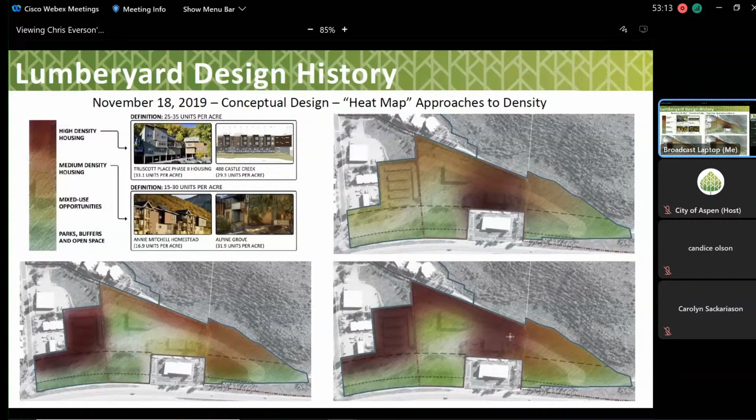Moving on from November 2019, we started to look at different levels of density being applied to the site. We had a 140 unit site schematic, very rough plans here.

Another 175 unit plan here, and then moving up to 215 units here. The council told us at that time, we want to expand the range of density alternatives that the team is looking at. So we were looking at a certain number of units, a certain amount of unit square footage in these plans, and a certain number of bedrooms in each of these plans. I'm just trying to carry through the theme through all these slides of the number of units roughly, the number of unit square footage roughly, and the number of bedrooms roughly.

Moving on to the next point in design, we got to July of 2020, where we really did expand the range of density we were looking at. We had a concept 1, which were these two upper layouts, with a 1A and a 1B. The 1B, again, was that roughly 215, 216 unit range, but a much higher unit range here at the 450 unit level. But you can see what that does to the unit square footage, up to some 325,000 square feet of unit area.

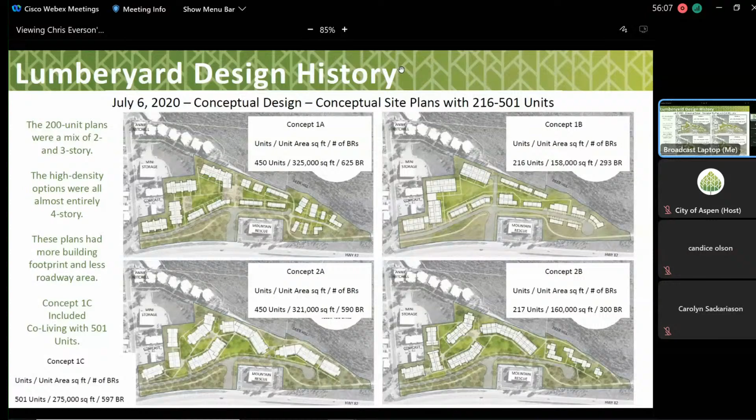So when we then took the next step and decided to go later on in 2020 to our next plan, well, we did still have a co-living plan, but we were zeroing in on this 300 unit range. We had a plan with 250 units total and had around 350 bedrooms. Another plan with concept B here was 300 units, which was about 230 square feet of unit area. And unit area is inside the units, inside the buildings, not overall building area, so that's the total of the unit area, 425 bedrooms in that plan.

And then we did have this co-living plan that had 330 units. We started moving in the direction of roughly the 300 units. I think, Tori, around that time, correct me if I'm wrong, you were 300 to 325-ish when we started going to the next plan. At the end of 2020, or at least in our last work session on this topic, our plan had 310 units. We had 448 bedrooms and 240,000 square feet of unit area. And this was sort of our jumping off point to the schematic design process.

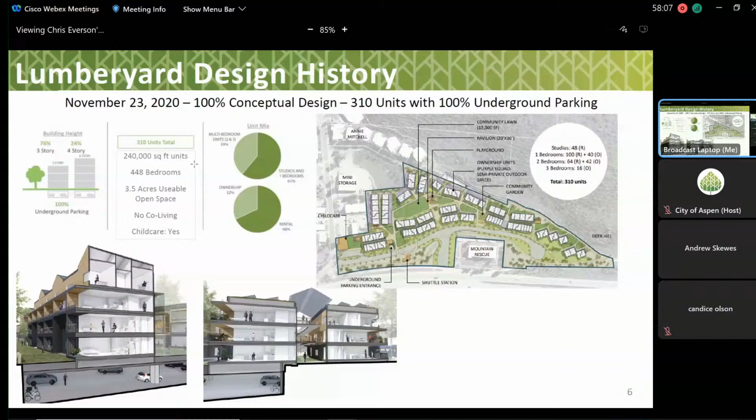Primarily by starting with a parking alternatives analysis, where we started to look at how can we now bring some of that parking back to the surface so that we're not 100% parked underground. We looked at 4 different plans that had basically 4 different approaches to this, and during this meeting, the suggestion was, is it okay for us to bring all 4 of these plans out to what at the time was our 4th round of community outreach, and start to test these plans with people.

These had varying degrees of underground parking. The hinge site concept, for example, in the lower right-hand corner was 60% underground parking. Pivot in the upper right-hand corner was 72% underground parking. The latch concept was 81% underground parking. And we had the flange concept with 0% underground parking. But the important thing to look at here is we've added a bunch of access roads now, which wasn't in the prior plans. So in order to access the above ground parking, we need a way to get to that stuff.

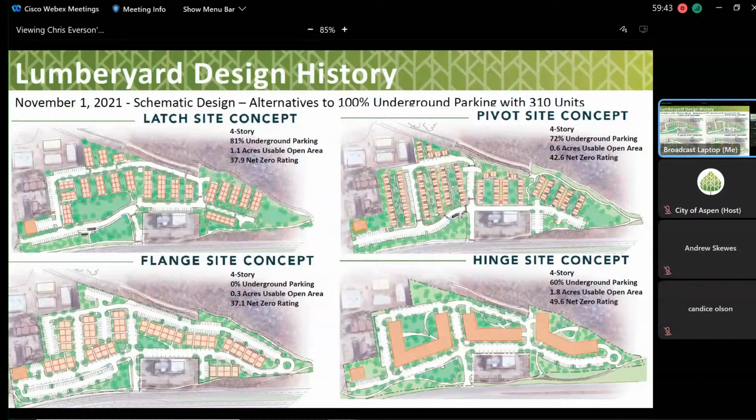So after we took the next step of bringing these plans out to the community outreach, we came back to you in January of this year, and somewhat with refinements to those plans.

And we also at the time had the EPS market study report, and it had sort of a base recommendation in terms of what the program should look like. But then it had an alternate where they were adding more 3-bedroom units, converting a lot of the... we also talked at the time about the studio units, right?

And we essentially made the choice to convert a lot of the studios into 1-bedrooms and into 2-bedrooms, and we added some 3-bedrooms. So now we're adding roadways so that we can access the above-ground parking. We're adding a bunch of unit area by adding more bedrooms to the plan.

And so we wanted to evaluate those 4 different plans, and you might recall that we used this tool that we called our matrix. That's right. And it was through these numerous different categories that we were looking at: community connection, sustainability, pedestrian friendly, living well. A lot of the livability criteria that we talk about as some of the baseline goals of implementing housing that's going to work for the community.

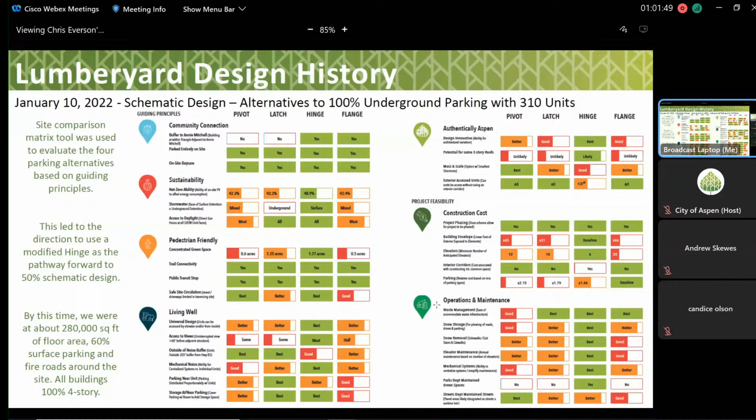And so the decision was made to start to move forward with the hinge plan, and we showed you some of these renderings. I think we mostly showed you this rendering on the bottom, but we did have some other colors. But it was really the height and the way that height was presenting that council had some challenges with.

We pointed out some areas, some challenge areas on this plan, related to just difficult engineering areas where we have some tight areas on the site that we'll have to deal with. At this point, we did know that everything was 4-story massing. There was a lot of attention brought to those open, consolidated green spaces, and a lot of folks liked those open green spaces and those opportunities for livability.

We had 286,000 square feet of unit area at this point, which, remember, we started the schematic design process with 240,000 square feet of unit area. So we keep adding roadways to access our now above-ground parking, we keep adding unit area, and this is coming out of a desire to do as much as possible for the housing crisis.

And so trying to get as much out of this site as we can. And I think you've done a good job of pushing that envelope as far as trying to get as much out of it as you can.

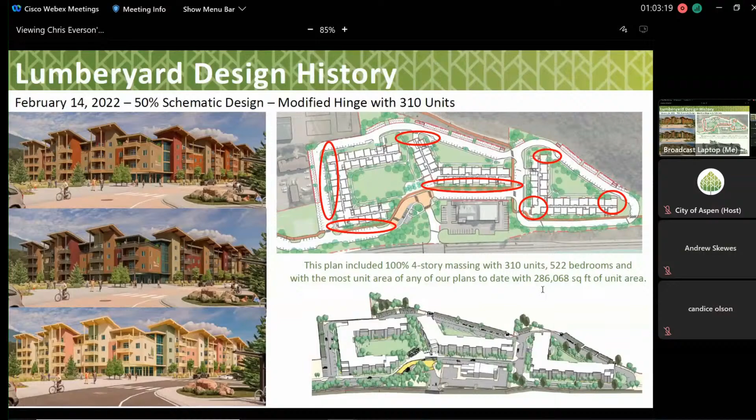And so in our prior work session that got cut short, and our work session today, we're looking at these two alternatives. We did get through presenting to you the 310-unit plan, which has 492 bedrooms. And the thing about the 310-unit plan with 492 bedrooms, that's 44 more bedrooms than when you started the schematic design process. When you finished conceptual design, you had 44 fewer bedrooms, and you had all 100% underground parking.

Now with this 310-unit plan, you have 44 more bedrooms, and you have 43% above ground parking. So I think you've done a good job of pushing the envelope in terms of how much you can get out of this site.

267,000 square feet of unit area in this plan, and again, all 4-story masses. So what the team is going to do is they're going to quickly, again, rehash that 310-unit plan.

And then introduce one of the things you asked for, which was a recommendation from the design team, which they're calling the elbow room plan, which attempts to - I'm going to backtrack real quickly one slide - which attempts to address some of these challenge areas that we had pointed out, and we will continue to point out.

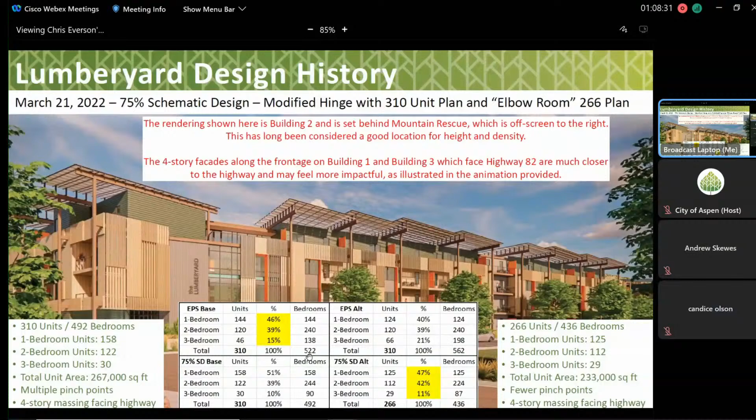We also still have the 310-unit plan to consider, which has more one-bedrooms and about the same number of 2 and 3 bedrooms. So the 310-unit plan really focuses on adding those one-bedroom units. I just wanted to point out where we've come from in terms of the flow of this schematic design process.

So in summary, we started looking at some of these plans in 2019, in the 140 up to 215 unit range. In July of 2020, the 216 up to 450 range. But really, I want to focus on the fact that at the end of conceptual design, you had 448 bedrooms.

If you go all the way to the bottom of this column on the right, which is where we've come in the schematic design process, and look at the number of bedrooms, the 310 plan has 492 bedrooms, and the 266 unit plan has 436 bedrooms. If you look back to where we ended conceptual design, you're straddling that number of bedrooms — the 310 unit plan has a little bit more, and the 266 plan has a little bit fewer.

So I think regardless of the decision you make today, these are good decisions. There's been a lot of progress made throughout this process. You've accomplished some of the goals you set out to accomplish in this schematic design process, goals laid out from the beginning. And you've ended up with 2 good choices, both right near that bedroom count where you started, one a little bit more, one a little bit less.

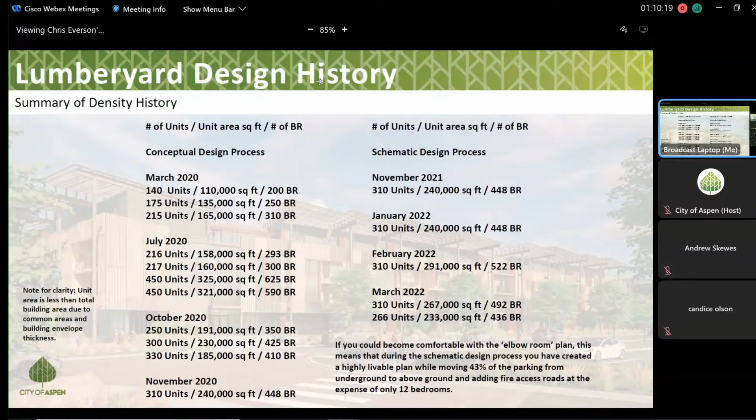That was all I had in terms of sharing my screen. I just wanted to point out that the aim of the presentation today is to make sure everybody's clear on the trade-offs they're making, whether you choose one way or the other. A lot of progress has been made either way.

As we go forward, 100% schematic design is not the end of the line — it's going to be a jumping off point for our development application. There's still room for some modifications, but at this point we really don't have a lot of room to start just moving stuff around the site and making coarse adjustments. After this decision point, moving forward, it's going to be fine adjustments from that point. I just want to make sure you understand the progress you've already made. Unless there are any questions, I'll turn it over to the design team.

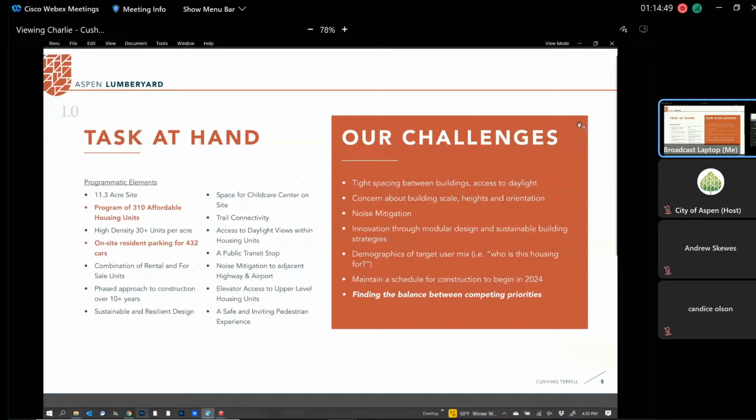So where we're at today is to really focus in on reminding and showing again the implications associated with the 310 unit count and the 432 parking spaces—showing that we've got life safety addressed throughout the entire site. That was a new element introduced related to fire access around all the buildings. We've got 100% of the units being accessible, and we're pursuing the highest sustainability goals that the city has looked at achieving.

We're focused on looking at the unit count, recognizing that we can deliver unit counts and bedroom counts in a couple of different ways, so we're going to give you those breakdowns. We're going to show you, as we did last time, what it looks like to stay the course with the 310, and we'll focus on this elbow room scheme.

The important thing about the timeline is that we recognize we've got very specific topics to cover tonight, and that's why we're asking questions and looking for a specific, singular direction coming out of tonight's meeting—because that's the only way for us to stay on track, stay on schedule, and be able to deliver into the next step, which would be design development. So we'll be back on May 16th with 100% set.

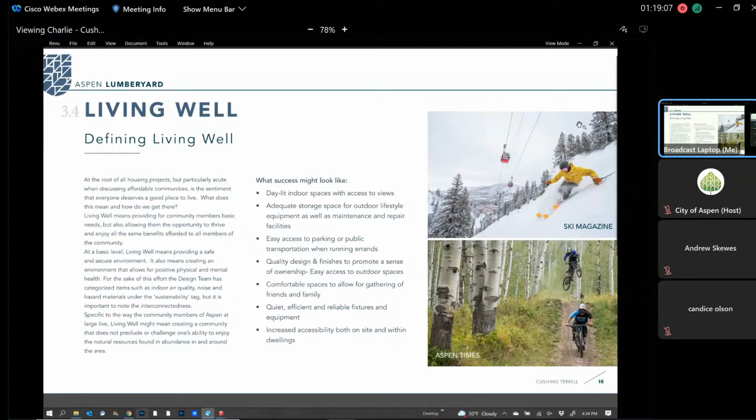In terms of authentically Aspen, we know the direction has to be rooted in and reflective of this place, this culture, and this climate. So you'll hear a lot of that this evening too as we move forward.

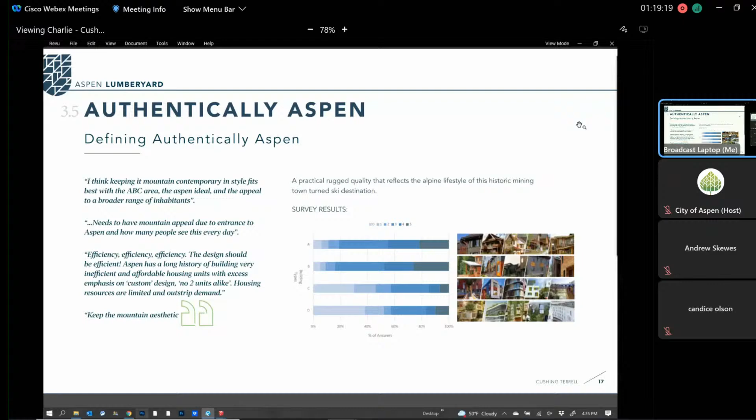The decisions we're asking for tonight are absolutely central to us being able to stay on track and get to the point where we can move through design development and construction documents, and actually start toward construction. This is our only chance to have construction starting in 2024—we need clear direction tonight.

So again, we're pushing livability on the site related to a lot of details we'll discuss. We're questioning whether the unit count should be reduced from 310, and we're showing you the implications of that. We've looked at some different routings for the bike trail, and we'll talk about those details. You'd asked us to provide a more modern, unique design, and we've got more details and refinement of that.

We're absolutely celebrating and accentuating the sustainable character of the site. In terms of materiality and the character of the building, tying that into Deer Hill and its environment is so important, and we think we've got some good images that communicate the potential direction for that. We've also got examples of how we're dealing with the perception of height, with some details about those approaches.

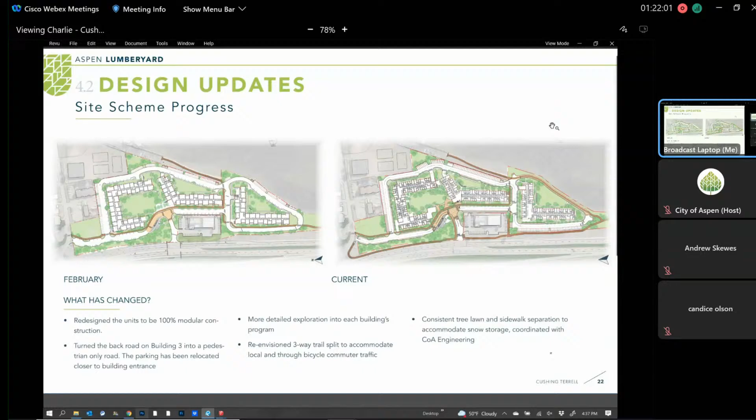Overall site scheme changes here, really just getting to a next level of refinement. The road coming out behind Building 3—Building 3 being the one here on the right, the south end of the site. But really a lot of our focus last time was getting more into the buildings.

So this is the stay-the-course plan. We'll show you this one more time before we get into elbow room, just to draw direct comparisons between the two. They don't jump out at you on plan at this scale, so we want to have those side by side and really point out the differences and some of the benefits of elbow room.

This slide was just highlighting that we can, working with the fire marshal, take out that road behind the building—something we were able to recently confirm last time we met. So I think when you see 100% schematic design, you'll see further development here, hopefully even a little more space donated back to building footprint and public outdoor areas rather than roadway.

Can't stress enough how big a change that is, instead of having a roadway there with cars going back and forth, there's a through pedestrian feel all the way up the hill, without being interrupted by cars passing through. I think it's a major change.

Between now and next time we're in front of you, we'll have a lot more details, probably some perspectives, and be able to talk about how that could be programmed with different activities. It could be more of a Zen connection to Deer Hill. The grading could work very naturally, and there's less need for retaining walls and things requiring maintenance and ongoing operational issues. So there are quite a few benefits from just not having another street and all that pavement and cars. It's quieter, and from a pedestrian standpoint, it's basically like living in a park.

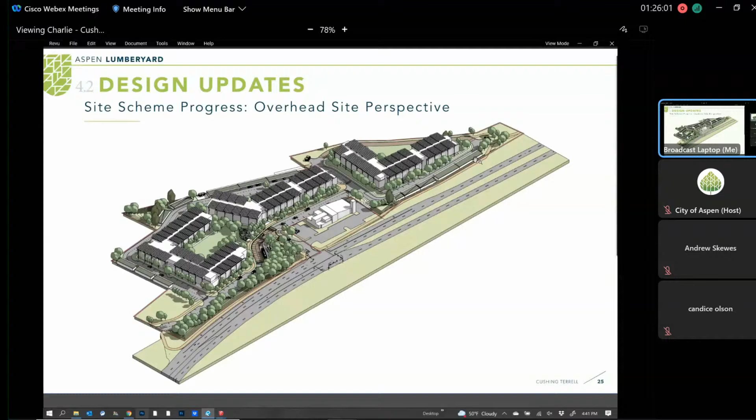Since you bring that up, I wanted to share, I went years ago and climbed the tower to look over the site. What I noticed was at street level, the noise is really lessened by trees and berms, and as you got up the tower, the noise became more and more prevalent. I wanted to bring that up because it really struck me during my site visit.

We keep talking about these 4 stories, and I keep remembering climbing that tower and how the volume just increased with the stairs. So when we get to the renderings showing the side-by-side view of the 310-unit stay-the-course plan compared to the 266-unit elbow room plan, there are a couple things I want to point out directly related to that. Thanks, Chris, absolutely.

I just wanted to point out a couple things, Charlie. In our thinking right now, building 1 and building 2 would be rental, and building 3 would be the deed-restricted for-sale building. So that's 209 rental units and 101 for-sale units in this scheme. Like Chris told us earlier, this 310-unit scheme gets 492 bedrooms, 44 more bedrooms than when you started the schematic design process.

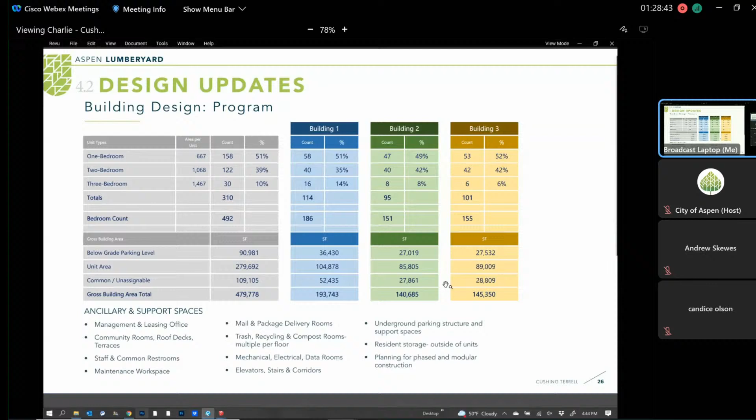What we talked about last time with the unit plans was a focus that moves it more towards a regular module, so there are some efficiencies in construction, with budgets, and even with your approach to sustainability. Fewer corners and details to work around, just a simpler building makes all those things a little bit easier, more effective.

Otherwise, there hasn't been a whole lot of changes in terms of square footage and amenities for the units. With the latest scheme, we no longer have the 2-floor units. Not so much that they were inefficient with square footage, but the way they laid out on site, they were a little bit longer, which created problems with how the building approached those pinch points. Being able to take out some of that length was really one of the driving forces behind removing the townhome units.

We will continue to look for ways to carve out a little bit of square footage with a conscious eye towards budget, but not without sacrificing any of the livability there. I'd say there are opportunities for fine tuning.

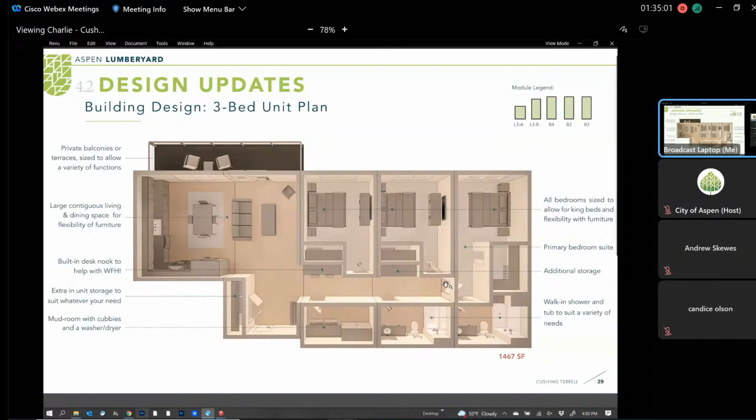Okay, well, I appreciate it, and as Sarah said, we have a team of experts, so the only thing I just wanted to be sure of is that some of the necessities of the modular construction aren't necessarily driving all of the design elements. So for example, there's definitely feelings and thoughts about somebody's living room abutting somebody else's bedroom, stuff like that, because you'd have your loudest area of one home abutting hopefully somebody's quietest area or what have you. But as long as those kinds of things are being taken into consideration, that you guys have that in mind as you're designing and looking at layouts, then I feel comfortable with it. I don't want to get into those because I'm not prepared for that, but what you're bringing up is important.

We have less issues with wall-to-wall unit partitions. We have more trouble usually with floor-ceiling sound and vibration transmission from unit to unit, but still important. Also, these buildings, compared to buildings we've done before, some of which have been very good, these are going to be highly insulated and designed heavily to deal with sound and vibration transmission. That's partly by choice, and now we're requiring ourselves to do it under sustainability programs. So all those things you bring up are super important. Yeah, appreciate it, thank you.

Yep, and really at the heart of why we're showing the units is to just instill the confidence: one, we're in line with APCHA standards for sizing, and two, we've thought through these livability issues. And just as an aside, modular, having those double wall conditions, really helps with sound transmission and reducing it.

Thank you. Same kind of thing with showing you the floor plans - the types of things we want to point out here are some of the hurdles with the concept design that we're addressing, shown here with the direct relationship between parking and the building over top of it. It's just much more efficient use of space on site and dollars when it comes to construction.

Also wanted to point out that one of the things that comes up commonly with public outreach is storage, and making sure we've accommodated that to some degree near the parking, knowing that people have bikes, and that's one of the biggest issues - getting all your outdoor play stuff to your car and out. Whereas if you had a garage in a single family home, that's not so much an issue. So just helping out with livability.

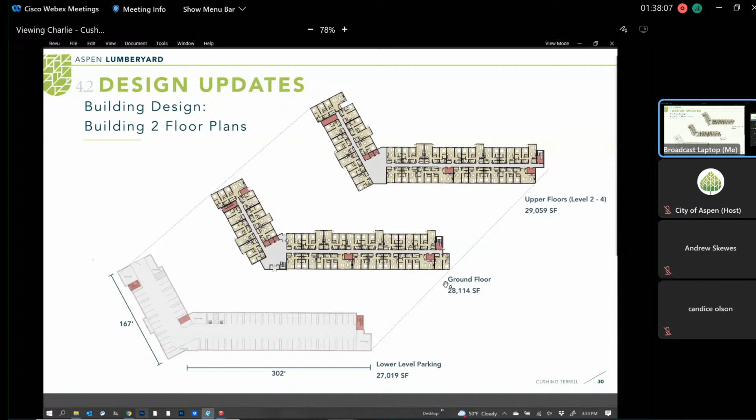And then as we get into the individual floor plans for each building, we're showing the ground floors really to show you some of the relationships, in bright red, of some of the leasing and common spaces, some of the amenities to these buildings, and also just how you operate these buildings. These buildings require leasing offices, maintenance staff, et cetera. So showing that that's accommodated for, and that stairwells and trash rooms are well dispersed and not inconvenient to residents.

Things like elevators have a pretty high price tag associated to them. That's one of the advantages of the hinge scheme versus some of the others, because we only have 3 buildings, there's fewer elevators. But we're making sure if someone parks on one end of the building with a stroller or a ton of groceries, they're not having to walk all the way around the building. So those are the kinds of things we're trying to illustrate with these plans.

That's following suit with buildings 2 and 3. One thing to note with building 2 is that with buildings 1 and 2 being leased, the operations for those buildings don't have to be dispersed between the two, whereas if building 3 is ownership, they need to have some of their own support spaces. We're making sure those are accommodated, and we're still at a level that's not all worked out.

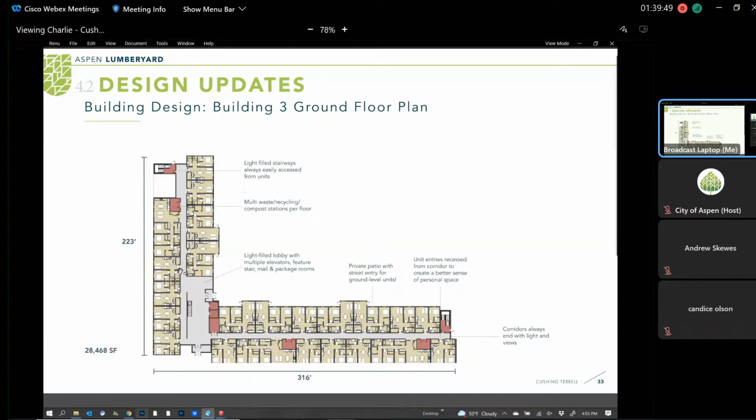This council and a lot of community members were reluctant about the large buildings, and indeed some of the early plans we saw were much more broken apart on purpose, checking that out for layout. But this council has gone with these larger building models because efficiency was a big deal for us.

I'm trying to remember, interior corridor versus exterior entrance. People wanted the exterior, and it was one of the few things, but they also wanted the environmental stewardship, and so that was the necessary trade-off.

In the open space between the buildings - that was another real positive about these. I guess we had a list for that - the matrix, I'm told. Yeah, right, the matrix. We spent some time on it.

Looking at all of those livability components, the sustainability, the efficiency of big buildings - I don't think loving big buildings was one of the reasons why we chose this plan, but there were a lot of reasons to choose this plan.

In terms of your net zero related goals, this was the best fit. In terms of casting large shadows throughout large parts of the season on the next building, and the difficulty that comes with casting shadows from one building to the next - there were lots of reasons, including snow removal.

In terms of its location on Deer Hill, which is in my backyard, I walked up and down Deer Hill many years, lived there 15 years, took lots of photos. It's a harsh, tough environment up there, mostly a sagebrush community with some Gambel oak, so there are hues of green. What I was really thinking about is how can we integrate the sage colors and the green colors.

What I seem to remember is this plant that comes up pretty soon, in the middle of April, so to speak. It's called the arrowleaf balsamroot, that yellow plant that comes up. You'll see it on a lot of the hillsides around here, and when the flowers come out, it's an amazing pop of color we get between April and, I think, they start to go away in June.

That was one of the inspirations for the colors, as well as the Indian paintbrush, with its red hue. These are really amazing plants that rely on other communities, other species to thrive, which I thought was a nice twist to what we're trying to do here.

So the palette you see here, the greens through the oranges and the blues, are completely taken from Deer Hill's palette. There's nothing man-made here whatsoever. I've just been feeding these guys the colors and ingredients that have come directly from Deer Hill, and come up with that palette.

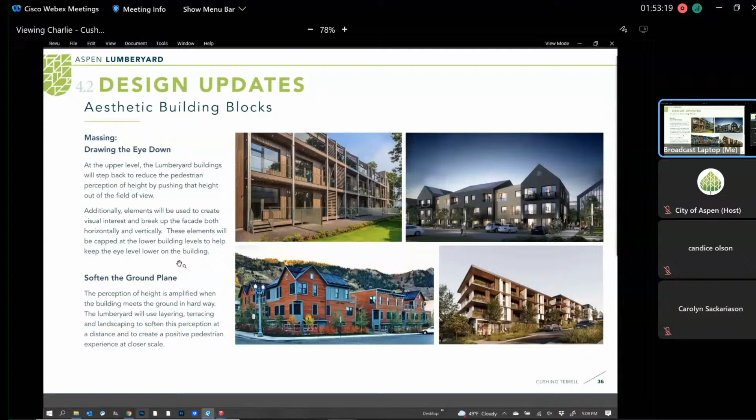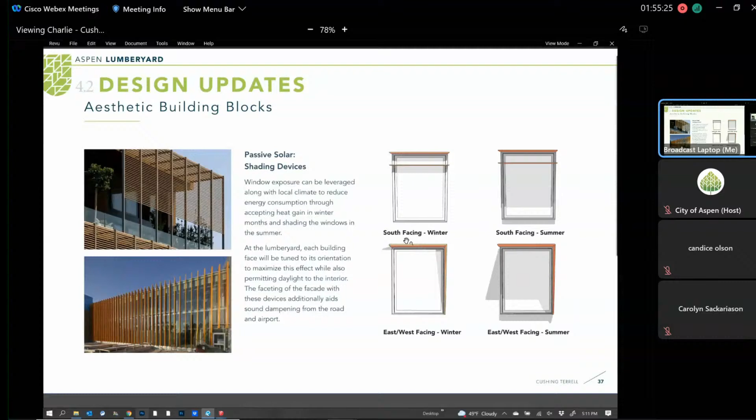But that's starting to build a language for this design, an aesthetic that is functional. So how do we take advantage of that?

There's also a lot of advantage in this in terms of our modular design. Having a separate structural skeleton for supporting the solar system works really nicely with the modular design - they're not competing. We're not having to get overly complicated with the modular units and how we're integrating that. They play nicely together in the same sandbox.

While we're on that - early discussions sometimes brought up the idea of usable rooftops and even green rooftops. In the last iterations, we've really seen all of the rooftop being utilized for the solar. I just wanted to check in with council members and make a note of that. How do we feel? Where are we at with that?

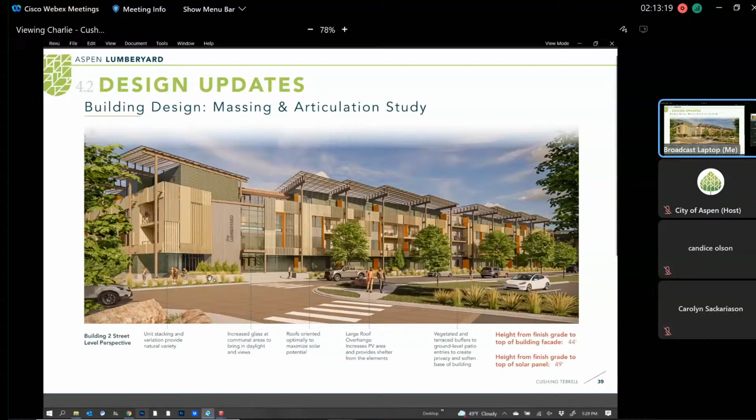So just to interrupt real quick, I want to be clear, the material choices are not made yet. But the intent of what we'll be aiming for when we choose the materials is the purpose of those choices. The idea that we would use lumber is not predetermined. The material choices here are going to be very important in terms of maintainability and sustainability. So the intent is here, but the actual material choice is not necessarily made yet. Great point. And really, your feedback today sets us on a course. There's still plenty of decisions to be made, especially with materiality and how we actually construct these things. But knowing that the intent is right lets us move forward on that path.

Yeah, I'm just a little curious on the corrugated metal. I know I've seen some faux old buildings that use a corrugated metal, and it gets oxidated and looks rusted and old, and that kind of adds to the mountain aesthetic. Is that what you're envisioning here? This looks pretty contemporary. I'm just curious how that fits in.

So we've actually talked about a couple different things. One was we were curious what you were going to call out with the orange here, and the idea of the metal you're talking about is called Cor-Ten. What it does is it naturally rusts and creates a protection layer at the top, and underneath is protected from that, so long-term it's a very durable material. It's not a very nice material to interact with in terms of being up front to it and touching it - it will come off on your fingers. You don't want to have to seal it.

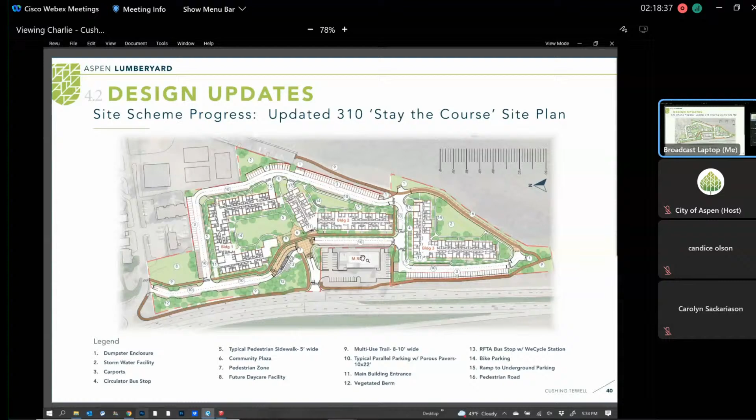Yeah, I went over this at the last meeting in some detail, but I thought this would be a good opportunity for you guys to ask any further questions you might have. Again, this is the full 310. We haven't started talking about the elbow room scheme yet. We'll get into that in just a minute, but just want to give you an opportunity to ask me any questions about the site plan or the team about 310.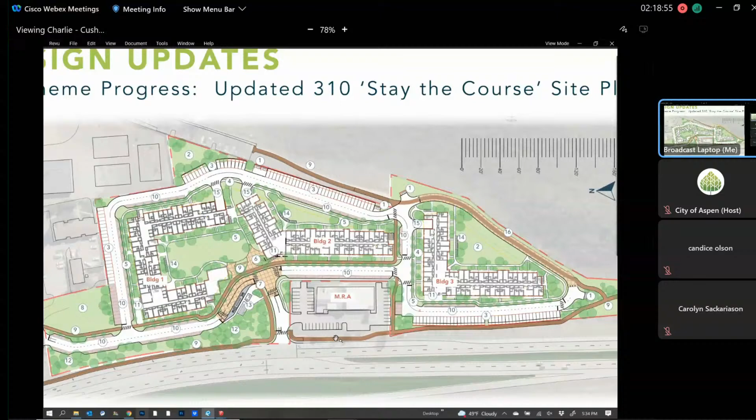Alright. I'm sorry, you're asking for any final? Well, we're just, if you've got any questions about what's going on in the site plan, where the roads are, where the parking is, any clarifications you need—any high-level questions just to help you orient before we compare one scheme read for the other.

This plan, is it legible to you? We spent a lot of time on it in the last meeting. We just weren't planning on going through and walking through it in the same way. If that would be helpful for us to spend more time on it, we can do that. If the council has a general understanding of the 310 site plan, then we could move on and do the comparison and explain the other items.

Good, skip. Okay. I think you covered this previously, but that the perimeter road would be wide enough for a bus to do a circular route? More than enough, yes. It's really the design issue for it is the fire truck, and the needs of the fire truck are greater than the bus. The radiuses and all those things have been taken into consideration in the same way.

Unless, of course, you're bringing back RFTA's articulated bus, which we haven't seen. We've reviewed those things with the engineering department—we've been having meetings with engineering staff who's been extremely helpful, participating in the process with us and helping to guide us with things like that. Yep.

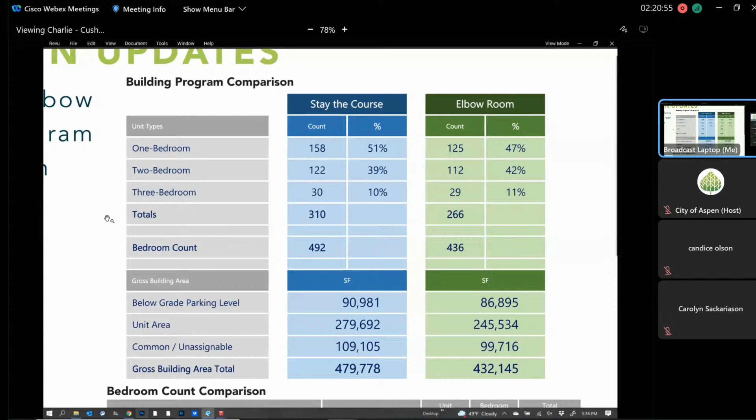So we just wanted to put these two programs side by side. In blue, that's the stay-the-course plan, the 310 unit scheme, and in green is the elbow room scheme, 266 units. Reflecting on the differences: with the 310 we've got 492 bedrooms, and with the 266 we have 436. That's a 56 bedroom difference and a 44 unit difference. So those are the specific statistics associated with those differences.

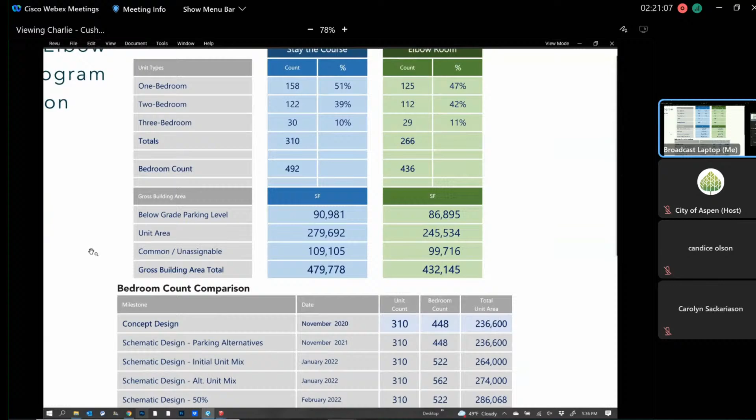When you go down to the gross building area, comparing 479,778 to 432,145, that's a difference of 47,633 square feet. So with the 44 unit reduction, there's also a 47,633 square foot reduction in that total project area. That's a gross calculation there.

There's a big money difference right there. That's a dramatic impact on the budget, the initial budget that would be necessary for the project. I think that's important to recognize as an aspect of this.

We talked about how bringing 43% of the parking to the surface creates some savings there, maybe $10+ million. That difference in gross building area between the 310 and the 266 plan is about 50,000 square feet, which is $20+ million. So if we look at those two things together, the savings associated with the parking approach plus this square footage reduction, that could be upwards of $30 million associated with the impacts of these kinds of decisions.

The other couple things we just want to note: funding being a constraint, right? That's a difference in implementability. You'll need more money to implement the plan that has more.

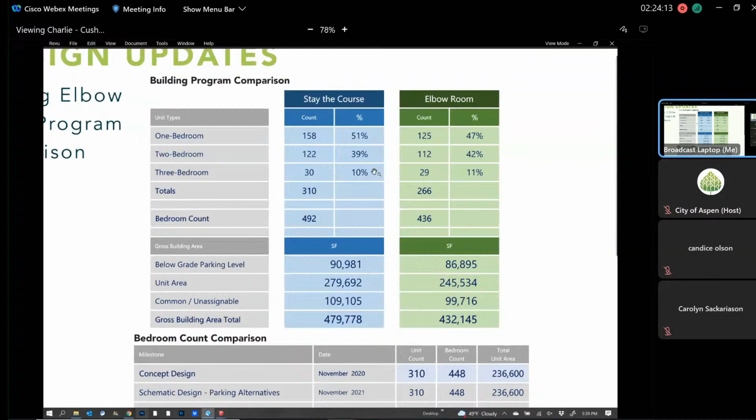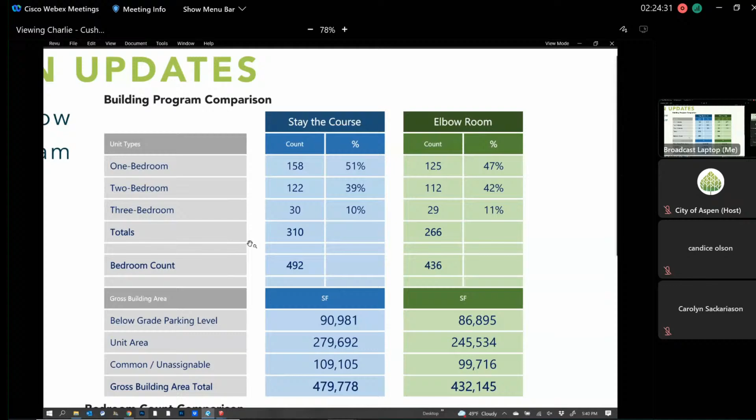Can you go back to the side-by-side table? I'm just trying to make sure I understand the numbers—this one, at the top? Yes. And that's unit count on each one, right? Yes, and if it's helpful I could go through the breakdown. What I was trying to figure out is it's 33, 10, and 1 are the differences, but in the other slide I thought you said we're only losing 12 bedrooms—did you say that? Yep. Look at the bottom, you'll see that, going all the way down from the original. We started schematic design at the top of that chart, where it says bedroom count, with 448 bedrooms.

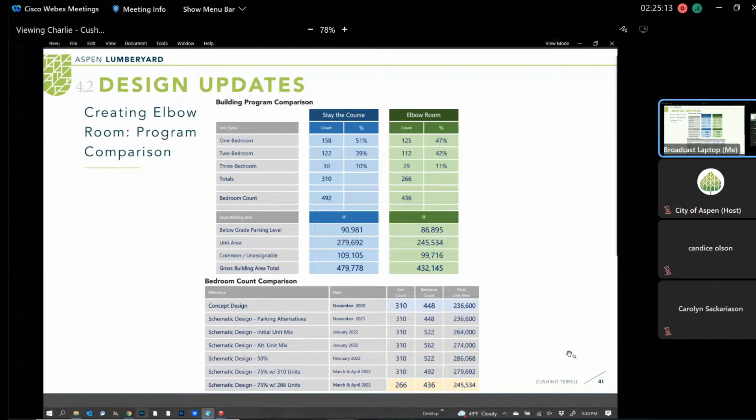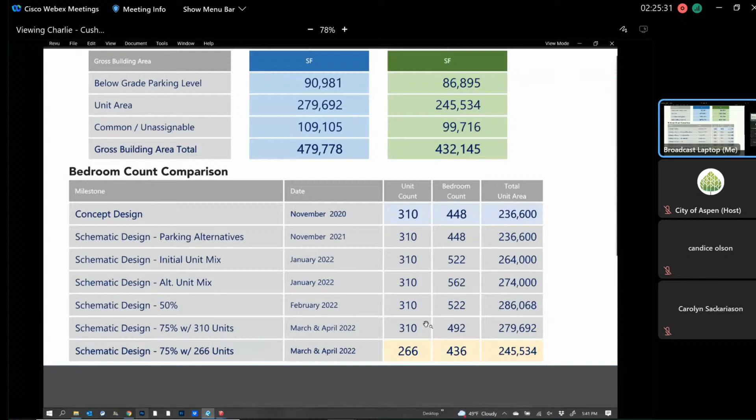So jump to the bottom two in that same column: it's 492 in the 310 plan, 436 in the 266. Just one other thing to point out here: the 310 unit scheme at 75%, with 492 bedrooms, that's 44 more bedrooms than we had in the original scheme. So we actually increased in the 310 scheme by 44 bedrooms. Understood, thank you.

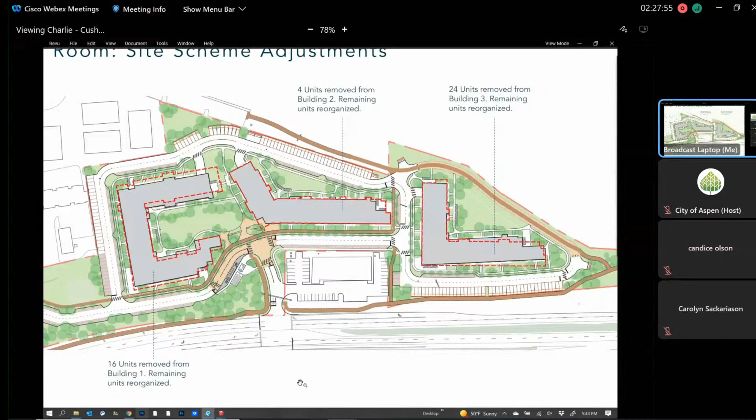But what we're looking at in the solid gray hatch is what we're going to get into. This is our preferred direction at this point, 266 units, going through the units we just talked about that were removed. Again, that's a difference of 492 bedrooms versus 436 bedrooms. We've got a few more slides coming up that will zoom in.

It's a little difficult to read, but we'll talk about some of the obvious benefits in front of us. Obviously there's less parking required with the 266 option. We're actually showing the same number of parking spaces above ground as below ground, and we're at a ratio of 1.53 parking spaces versus the required 1.39.

So less parking could happen here and could occur here. As a result, we could remove parking from the basement or the surface and create more storage for the tenants, which has always been a hot topic item. Anyone you talk to is after more storage.

Another item that will come up is part of our sustainability approach. With the solar, there's going to need to be some storage and battery backup. So some of that space that's maybe parking now in the basement could end up flexing with some needs for battery storage.

What was referred to in terms of potentially reducing some of the on-site grade parking is we've started to talk about this in previous meetings, things like Uber pickup or food delivery loading zones, some things we all think are necessary and important aspects. Maybe we pull some of that back from what's shown currently as just straight surface parking, and get some of those features folded in.

Sunlight is a huge quality of life thing. But I was wondering, looking at this, the only area where I'm seeing buildings close is between 1 and 2, and it's sort of that half - so is it just that corner that's representing the whole thing? And isn't that a stairwell on the backside there, like half of the building's a stairwell? Yeah, so there is a stairwell here, and there is a unit and a stairwell on this back corner.

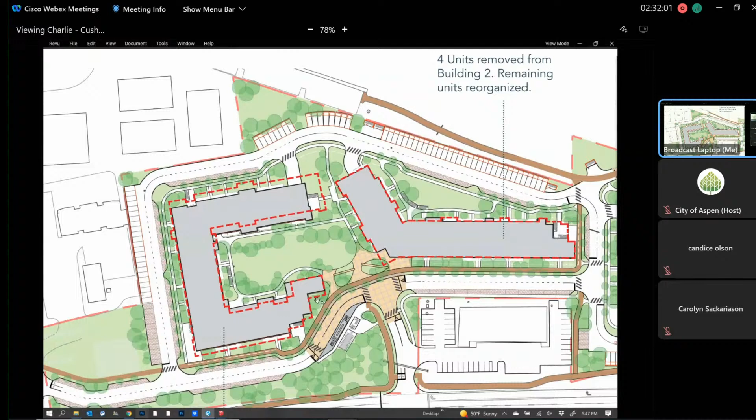There's a number of reasons for making this shift. I'll just go to the next slide. All I'm asking is that, because that sun seemed important, but is that actually going to make any difference? Let's get into the units, or details, if so. Is it just obviously a couple units? It'll make a big difference, I think, for a number of reasons.

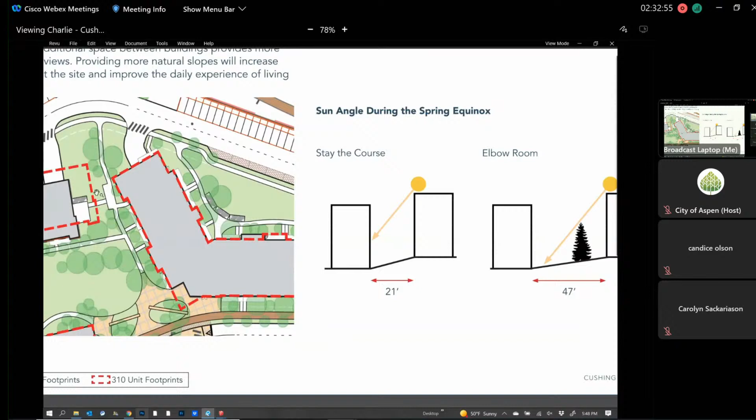One is daylight on the unit that is in this corner, or I should say on this bookend. The other is trying to get more daylight on the ground there, knowing that's going to be a maintenance concern. Over the entirety of the site, our grading works out pretty well, except for here, because it's a pinch point. So this is to scale in terms of building height and the grade difference between the two. And when you start to layer in sidewalks and stairs into these units, you can imagine how 21 feet is a challenge in that area. So it is daylight, but it's also having a space that transitions nicely between the two buildings.

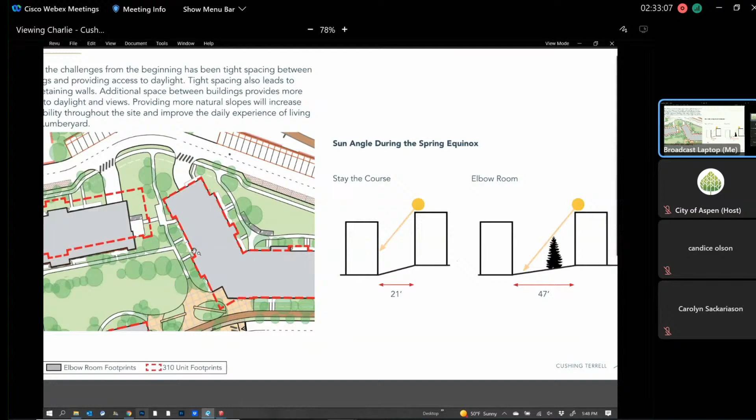The other important thing is the vista upon arrival at the site. As you come up to the intersection with that 47-foot width as opposed to a 21-foot width, your view through and beyond the site will be a dramatically different experience.

Your point's well taken in terms of the sun, but you've actually pointed out very correctly, there's a stairwell access point right there, and having the sun be able to melt that snow versus having it shoveled or be icy, was one of the arguments I was going to bring up for leading.

Got it. But yeah, on the snow topic, we've been working with city engineering, very keen on lots of snow storage, lots of separation between the sidewalk and the back of curb. With the 310, we made it work, but there's very little wiggle room for additional snow storage in these bigger years. So snow storage is a big one that we're getting as a result of the elbow room concept.

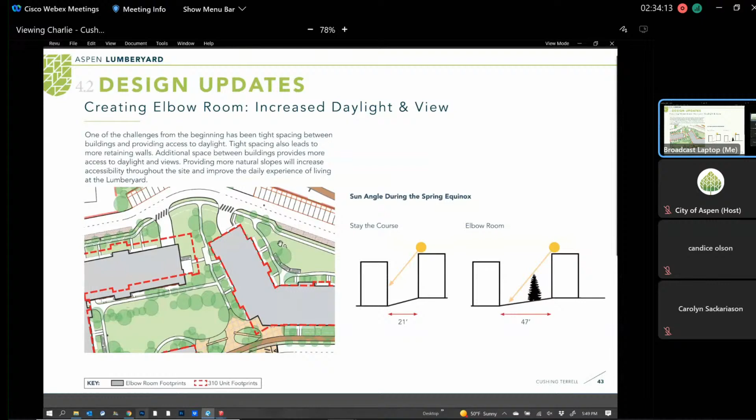And then there's a few other items on your list about the fourth floor. So this starts, and Giles can speak to this as well, but one thing I wanted to point out is the specific difference in the relationship to the sidewalk.

Stay the course. This is not the universal condition. In most places, we have been able to accommodate a nice soft transition like this, but with stay the course, there are places where it will be difficult or cost prohibitive to access that ground level patio.

Whereas with elbow room, we can say with authority that this is the condition we can achieve with all ground floor units. Is the condition to the left adjacent to the front of building 1 along the frontage? It could be building one as well. There's a couple places. I look at that grade transition there, and we have to figure out, as we bring this to implementation, it does make things more difficult. It's not only livability, I mean it's doable, but I more see that turning into a wall, or something like that.

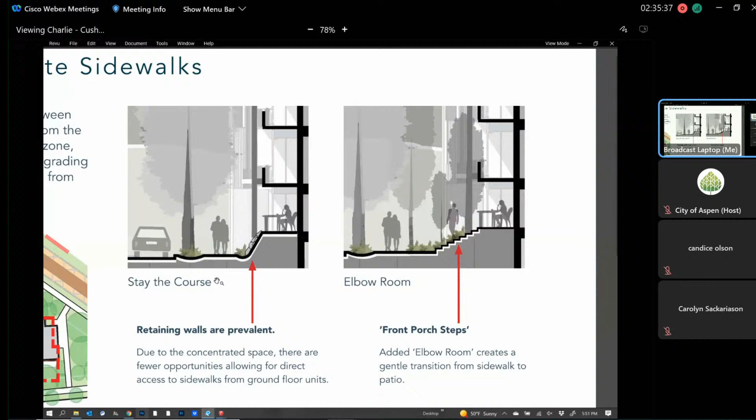But can we look in plan where that occurs? So we illustrated it here as one example. It's happening on building 1 as well. I'll go up to the overall site plan, and it was also happening here along building 2.

So it's just so much more livable with that, and there are no pinch points. It's no 'ooh, we could have done better.' It just fits, it's like wearing the right pants, it just fits really nicely, with the before and after. Just trying to squeeze in some elastic waistbands. So this slide is a great one to just bring this up.

I was very much in favor of you guys giving us your input, and you really have come back with exactly the information that I was asking for and hoping for. The sad part is how many units we're losing, because there was no intention of just losing units for the sake of losing units.

So it's easy for me to say at this time, I appreciate what you're demonstrating here. And I believe you in the sense that these seem like good changes to the program, because of how it's going to play for years and years to come. Last thing I want to do, and that's what I was asking about with the design of the bedrooms or the layouts of the apartments, is put something in the ground where people really don't like it. When it comes to your place of living, it can be somewhat small things that make the neighbor feel how on top of you other people are. And that corner image you're showing really demonstrates exactly what we're talking about.

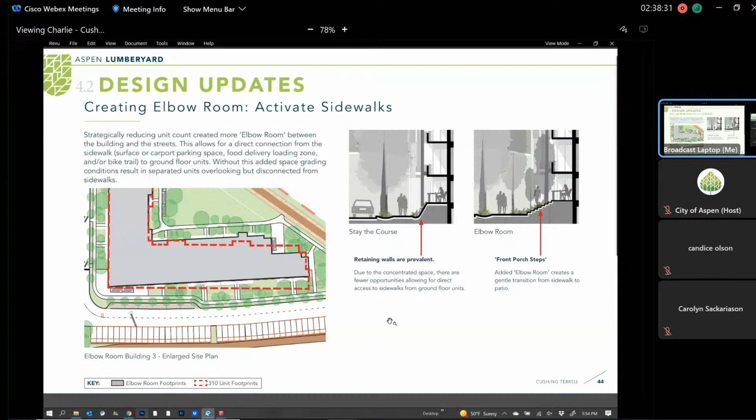We anticipated that you'd feel that way, and that's why we feel like these are two good options. I think we need to, this is to my team here, pick up the pace and get this information, because we've got a handful more of these kinds of issues to go through, and then we're going to summarize with some things. Let's do it.

Sounds great. So the next series of slides is really looking at height on 82. This slide is showing you where we think it's appropriate to suggest reduction of height along 82, and that's with Building 1 and Building 3. These are where the buildings are in closest proximity to 82. So this isn't just perception of height. This is, I think, Tori, you mentioned, they're right up against the airport, in terms of those fourth floor units being the ones most affected by that line of sight to the airport.

It's exactly what you were talking about, Mayor. It's the top of the tower, it's what you experienced. So we're proposing that for those two buildings, in that almost even line to where you were standing at that tower, we consider eliminating those. Part of that is the sound issue, absolutely, and part of it is just a scale issue. We've got some images to show you to explain that.

So this is an illustration of Building 3 in both schemes - the stay the course scheme, and the elbow room scheme. Looking at it, if you did take that step back, there are obvious benefits: height on the street, noise from the airport. How else can we take advantage of that space? You reduce that line of sight and keep the units on the back, and then you can make a green space. This can be communal, or it could be somewhat controlled by the units associated with it.

It also allows an opportunity for these units to potentially be accessed directly from the outdoors. That's something we heard from the public. It's still accessed through an elevator and then outdoors, but it's direct daylight through your front door rather than to a corridor. Can you zoom in on that plan you were just focusing on, just for a second?

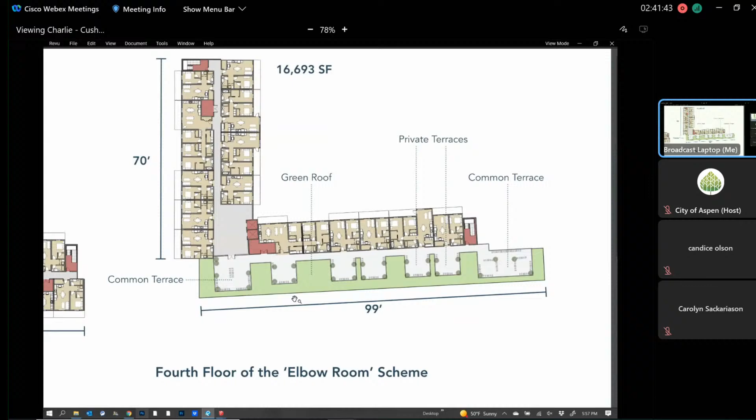So you could see that, just like Charlie was saying, you could come off the elevator, come right out, and walk along that terrace and get to your apartment, then get to the fire exit, the stair at the other end. Along the way, those could be some common terrace spaces, set up as more directly related to the apartment units, so they could be little private spaces for those apartments - but this is just a concept, just an idea. What we're showing in green could be green roof, and the rest could be a terrace deck surface. So we'll show you what sections through that look like and how that's got its own set of benefits.

So real quick, that is Building 3, which is meant to be the ownership building. You would have a similar condition at Building 1, which would be rental. You may or may not want to choose to create those spaces exactly the same way because of those two slightly different uses, so we would have to carefully plan the space out. But the condition of removing the units from the front of the facade would be the same.

Well, when we get to the side-by-side rendering comparison, let's talk about that. You'll be able to see the facade, which will help address noise. We'll talk about our sustainable building envelope, which will help us address noise. We'll talk about the use of the windows, which are needed to help us deal with our building envelope for sustainability, which also helps with noise. Then we'll talk about how you open it up. Want to go to the rendering?

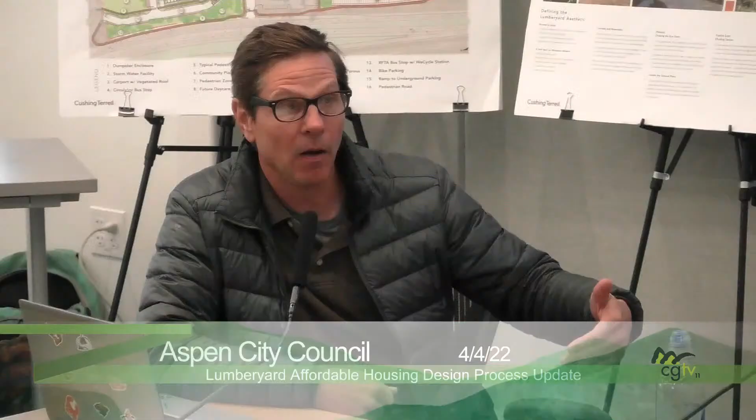Maybe it's off-season, maybe there are different times when it works better than others. So I was going to bring that up during the rendering portion. Do you want to go to the rendering first and then go to the sections? Yeah, we can skip ahead.

The section works as well. But the point is, it's not necessarily universal. You may want to use that upper level space, but you're making a choice to step outside onto that terrace, knowing there's going to be operations related to the airport as well as the highway. So you step into that terrace area knowing there's going to be some noise out there, and during different times of year and day, seasonality may change your ability to use that space.

But it also changes the roof line of the building. You can see in the bottom rendering more of Deer Hill above the top of the building because that upper level is stepped back. You can see how the eye is drawn below those solar panels to that stepped-back portion where the passive solar facade is. That passive solar facade is going to help us shield noise additionally - it acts as the handrail for that terrace area, and it helps partially block some of that noise as well.

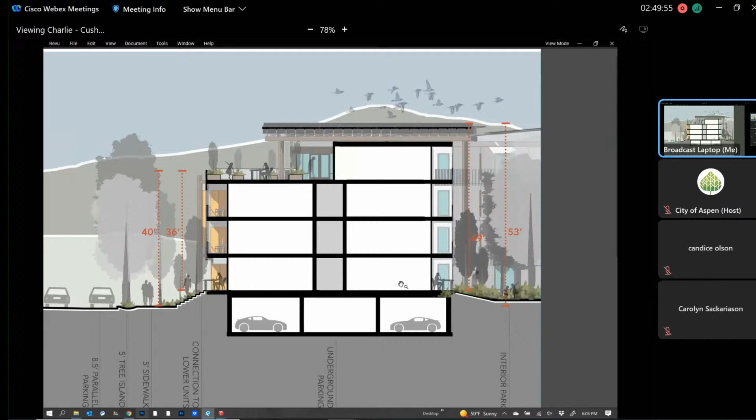We think that section tells a pretty strong story about how the apparent height of the building would be different, not only from 82, but from walking down the sidewalk or driving down the internal streets in the neighborhood. The solar panels also pull back - when you compare the two sections, you can see above the fourth floor roof line how the solar panels pull back, so there's actually open sunlight getting to the majority of that roof terrace area.

How does that affect the overall solar energy goal? What percentage do we lose? So here it doesn't show up perfectly clearly because the building is angled at this point, but the solar is broken up, creating this rooftop corridor for maintenance, et cetera. Here, it's pretty much the same amount of solar, just smushed back.

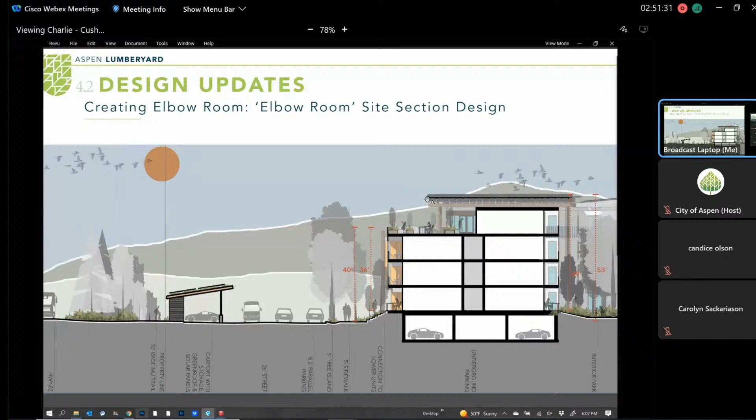The elbow room scheme has 3-story faces at buildings 1 and 3, and a 4-story face at building 2, and again, that's behind the Mountain Rescue.

One thing I wanted to point out, Mayor, is that in the initial acoustic study, they took readings up at the tower where you were standing, at the ground, and behind Mountain Rescue. On the backside of Mountain Rescue, it was 15 decibels quieter than the front side. So our interpolation is that the backsides of our buildings, where these green spaces are, should be at least 15 decibels quieter.

So this idea of the green roof terrace, which could sometimes be too loud to enjoy, points to a variety of outdoor spaces - some quieter, some louder, some more public, some more cozy. That's what we want to get into as we advance the design, so that based on your feelings that day, your personality, or how many people you're with, you've got different spots you could easily get to and experience the outdoors.

Time to run the video. Yep.

We won't be able to enjoy the elevator music, and our audio guy put some sound of cars in here as well. It was pretty elevator music for sure. I noticed the FR86 is in the garage, so we've got enthusiasts living here, which is fun.

Just imagine the girl from Ipanema. Just in case people pay attention to what models - see, now we all have LR3s. That's very telling, this is just in case little people are - details that matter.

Watching, this is the 310 scheme, so this scheme does not have those upper level units removed.

That was an illegal U-turn. I'd like to - yeah, exactly. But this probably is going really back, down 82, going past the site. There's Mountain Rescue, there's the main entrance, there's the berm. He went yellow, but I liked it. He gunned it, green, I'm fine with that.

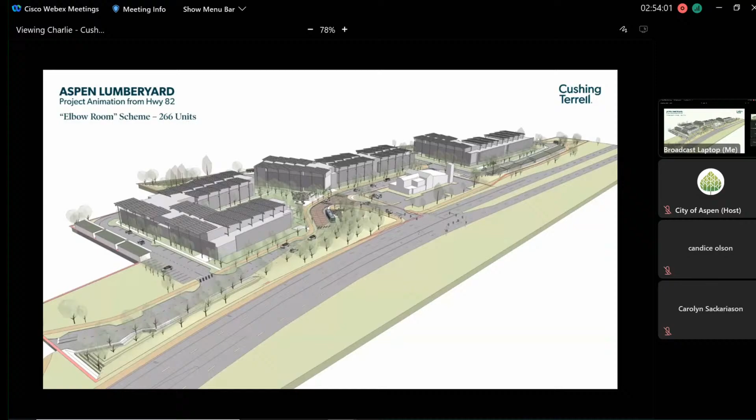All right, so switching to the 266 unit plan and removing those upper level units on the front side.

So there's a slight difference in how you would perceive that from building 2 - you can see it stays the same as it was. Everybody has an LR4.

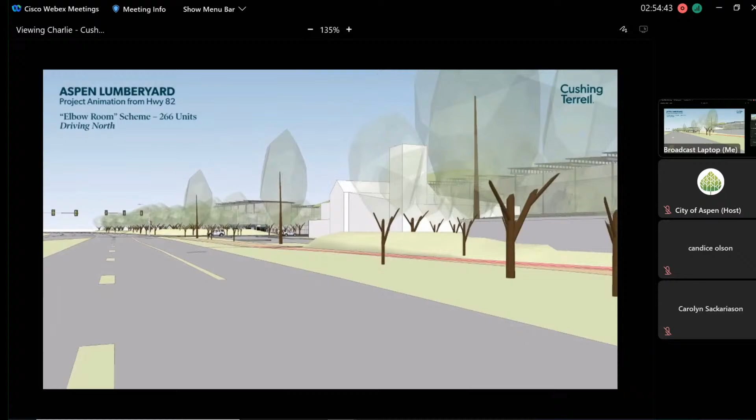So again, just trying to give you folks as much information as we can in terms of decision-making. Thank you for that.

So to provide some clarity for the council, right now this is presented to you as A or B. I actually think you likely have a third option of saying you don't want to lose 56 bedrooms, but you're willing to lose 30, and challenge that back to the design team. But they will not come back to you again - they would take that direction into their next step, and you'll need to trust their professional judgment on where to place those 26 bedrooms you wanted to put back in.

So there's probably a little bit of room in the middle, and I haven't asked this question of any of them ahead of time, but I don't think you're in an absolute position where you have to choose one or the other. If you feel strongly about addressing certain elements, such as the space between buildings 1 and 2, but you're not willing to address building 3 in the same manner, that's fine. So just don't feel too boxed in yet.

Can I ask a question on that? Sure, which just illuminated my thinking - I like the rooftop, but I don't think it's going to be used that much. But the front area on the ground level, I see the benefit in that. Do those necessarily come hand in hand? No, they don't. So those fourth floor removals can just be separate added choices - added right back in. Yep.

Yeah, just one point on that - we thought this was directly addressing some comments we heard about four-story masses, and so we were trying to illustrate a way to get some three-story, very front-facing, obvious three-story character. That's the reason we're presenting it this way - there are options here, and if those benefits were perceived by you to be enough to offset the unit loss, then it's worth considering.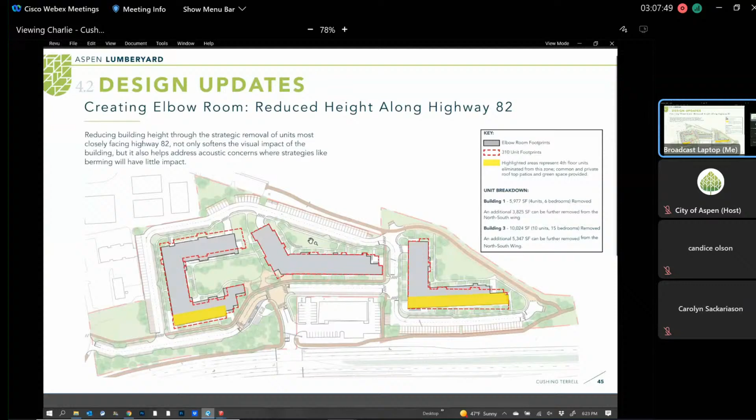So building 1, 4 units right on the front there, and building 3, it's 10 units. If we add those back in, we get 14 more units. That's correct. But your perception of height goes up.

We talked a lot about continuing to add things, and those things continue to put upward pressure on the height of the buildings—green space, parking, roadways. One other thing coming to light is that implementation of the renewable energy generation system with our electric utility is probably heading in the direction of some amount of battery storage.

It's not fully engineered. We're getting closer and closer because between our last meeting and this meeting we've had more conversations and more engineering work, and we will again as we get to 100%. But that space for battery storage, more than likely in the subgrade space, more than likely might need to be

space that we take some space away, either from parking or from some of the storage units that are down there. So we might have some difficult decisions to make, as we hear over and over people want storage, we hear equally people want somewhere to store their car. We might need to carve out a little bit of space for a battery storage room in each one of these, and that room may need a certain level of ventilation so it can't be out in the open parking area. So we might have to make some difficult choices about how many parking spaces to remove or how much storage to remove.

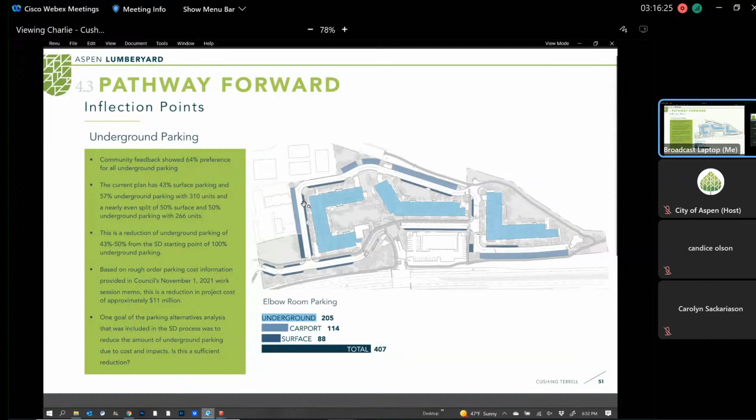And notwithstanding that, we would like to figure out management and also gaining back units. So that's the question to you - 50-50 over 100%? Yes. It's a no-brainer. All right, thank you, let's move on.

Okay, this one will probably snowball into a couple more things in terms of unit count, but it's the height - we'd like to focus on the height issue. If in your head the unit count issue is more important than the height along 82, that might steer where you fall on this line. But what we've presented is where we think building height is most impactful when you're crossing by the site, when you're walking on the site. So this is one strategy to deal with it. We've tried to inherently address it in the building design in the 310 scheme, but wanted to ask: are we hitting it with height reduction, with sense of height, or is this a hurdle we need to keep addressing?

Yeah, I honestly, when I first looked at the renderings, I wasn't sure which one was 3 and 4 stories. I appreciate you guys trying to step it back, but it kind of looked just like a different color variation more than anything. When you actually stop and look, you realize, oh, those are set back, and there's that little bit more of Deer Hill visible. So at a higher degree of scrutiny, those things stand out. But at first blush, how you'd see it from the highway, I don't notice a difference really at all. It feels like a really high price to pay in terms of unit count for a marginal, if noticeable, distinction in the aesthetic and outdoor spaces - I love the idea of these.

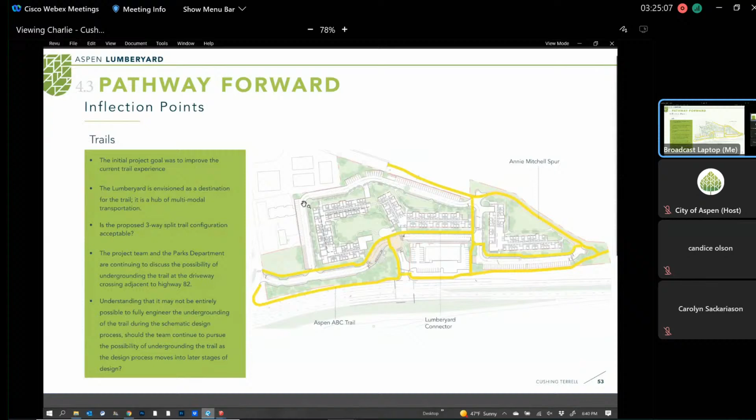Just as a reminder, the trail being called the Aspen ABC Trail runs parallel to Highway 82 and would be the commuter trail where people could open up their e-bikes to maximum speed. The top trail, called the Annie Mitchell Spur, would get people from Aspen up to the Annie Mitchell area.

And some of the other affordable housing complexes to the east of the Lumberyard. Do those two trails exist currently? Yes, they do exist today, but they would need to be modified by our new layout.

So the only additional piece here is the midline trail, which is for people who don't mind taking their time, engaging with the population, strolling around, or moving at a decent speed to the terminus -- for people getting in and out of the bike trail system from this facility, providing that connection.

Now, I've talked a lot with Matt Kuhn, Director of Parks. That entrance where the crossing is at grade, at a minimum needs to be improved over the current condition. Right now it goes straight across the driveway. More than likely, we're going to want to see that as a raised crossing.

But Matt and I have talked this through, and we think we should continue to work together with Parks and Trails. We haven't had the opportunity to fully engineer a subgrade crossing yet. We looked at trying to relocate that crossing to better facilitate it, but we haven't had a lot of success finding a better location for that underground crossing.

I want to continue researching the possibility of engineering a subgrade crossing there. We're at the point of almost settling on this plan of leaving it as an improved at-grade crossing, but with the notion that we should keep researching going underground. It's going to require retaining walls, more like what you see at the Truscott subgrade crossing with those big retaining walls.

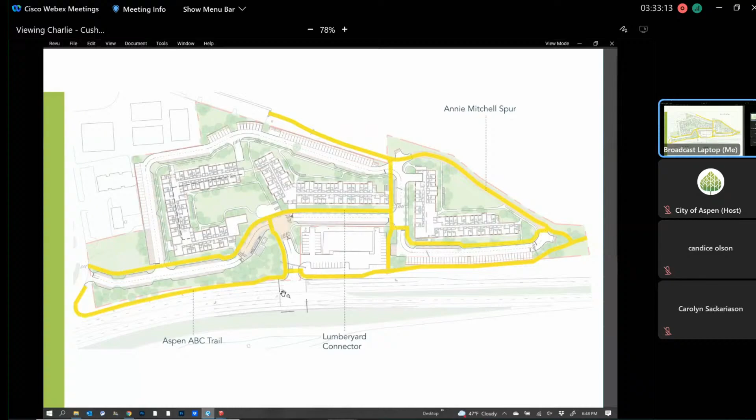Thank you for bringing that up. In terms of traffic, we saw the preliminary results from the transportation study. It says that at full build-out, this facility is going to generate 60 more automobile trips per day compared to the current condition. So it's a considerable number of additional automobile trips, which can be further reduced by having the shuttle services we'll talk about, and by increasing the transportation alternative options overlaid on this community. So 60 is the maximum, based on the engineering calculation using ITE standards, but it can be affected and potentially reduced through further transportation alternatives.

So at a minimum, we'll be making improvements to that crossing, and we can also do things to reduce the number of automobile trips.

Can I ask a question? Chris, about that 60 additional vehicle trips, is that number based on the finding that the lumberyard as it currently works has a lot of car generation from customers? Or is it based on the fact that we think a significant number of people who will be living here already live down valley and drive, or both, and in what ratio?

It's based specifically on the number of trips generated in the current condition, subtracted from the number of trips generated in the future full build-out condition. The future build-out number is required under the city's transportation impact analysis requirements to be based on the ITE, Institute of Transportation Engineers, calculation standards. So it has nothing to do with how many people will be relocating from down valley or up valley, et cetera—it's based on the specific requirements of the calculation, using accepted engineering standards for mid-rise multifamily.

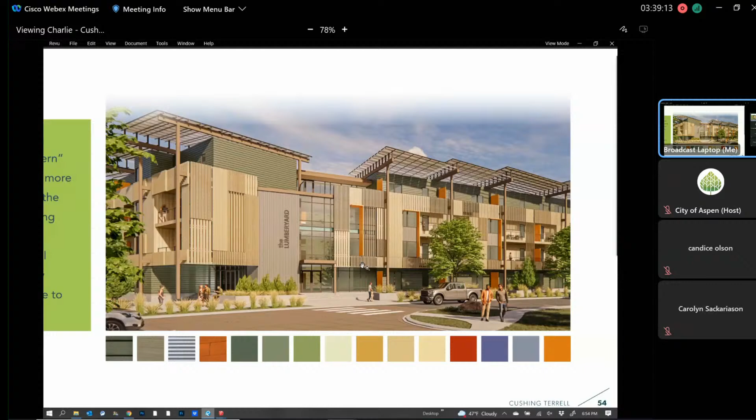Yeah, imagine if it was all wood—you'd start to get that Austrian precedent imagery we were showing you. Yeah, but we're trying to do that tie back to Deer Hill. I don't want to give contradictory feedback that confuses my point, so I will say, of the finished painted facade colors, I think the green is the most pleasing—green is always sort of more pleasing than the others. But I would really encourage us to focus on naturals.

One example of something that could relate to the green that stands out for me—go with me—the library in Basalt has that entrance that appears to be all copper. It's patinaed copper, and it actually is copper, and it's beautiful, conveying this immense presence and sense of quality. But I was recently at Taos or Big Sky, one other mountain town, and they had a very similar entrance—I thought, wow, it's so beautiful. I got up close, and it wasn't copper, it was a tile made to look like that. So it conveyed the gravitas of that natural material without being it. Maybe there's something equivalent for the green, where it doesn't have to be the actual side of a tree. That's helpful.

Thank you. The ongoing maintenance is really important to me. The color palette, I'm fine with, but wood—I have a cedar house, and wood takes maintenance. I think ongoing maintenance and durability is really high on my list. Understood, cedar's high on our list too. Next—I think you guys are on the right path. Thank you.

Great, thank you. Exterior access. On exterior access, we just wanted to make sure that the ideas we've been talking about related to the ground floor, opportunities for exterior connection—obviously there's double-loaded corridors that are all providing interior access. Again, that's 100% accessible; all upper floors are accessible by elevators.

And then knowing your feedback on the 4th floor step back—obviously this is not the correct graphic—well, it's just the idea that it's still going to have the ground floor. All the ground floor units will have that opportunity to get an indoor-outdoor connection, but the remainder of the apartments would be accessed from the double-loaded corridor interior.

Yeah, I mean, I guess of all the things that you guys have pulled units back for, this one to me has the biggest payoff in quality of life. Not only because the community clearly spoke that they like the outdoor access, but if I think of Burlingame, we're not going to have so many kids playing outside, but the interaction between community members could be substantially improved, and the connectivity in the community.

So I do see this conveying real benefits, but I would say for me, this project is already so compromised in unit count that as much as we can do to improve that situation without reducing bedrooms is huge, because yeah, the quality of life matters, but we also have to have a community to live here. So, but I do really see the benefits to this. I do.

John? Yeah, I agree. I like what you've done with the elbow room, increased livability, which is one of the guiding principles of what we're trying to accomplish.

Ward? Exterior entrance on the ground floor? Well, exterior entrance on the ground floor, yes, I think that makes a lot of sense. And what you're showing here is exterior stairway going up to the 2nd, 3rd, and 4th floor, correct? So that's the corridor that happens at each floor. The yellow line represents it just is letting you know at each of those 1st, 2nd, 3rd floor, there's a hallway—an interior corridor. That's how you get into your apartment. On the ground floor, you also have the opportunity to get access to your apartment directly from the exterior. Okay, yeah. Yeah. Okay? Thank you.

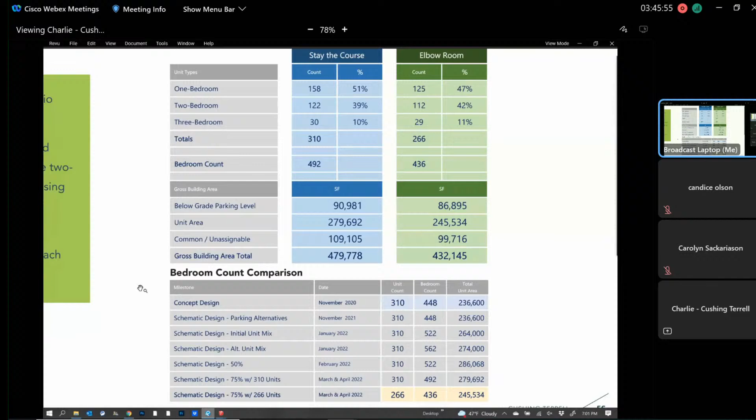Right? And so just throwing that out as a possibility while we're finding middle ground, that would cause us to look at, okay, how many 2-bedrooms are you left with? How many 3-bedrooms are you left with? And is that viable? Because I know in building 3, for example, we were running low on 3-bedrooms, and we might not want to take out 3s in building 3. So we would have to pick and choose where to make those choices. But we could probably eke out a few more units by converting a couple of 2s to 1s maybe, keep the same bedroom count, if you will, and help you with unit count, if that matters.

Or you might say, no, we want to kind of keep the ratios the same. So I think that's just another bit of wiggle room that we might be able to offer the team to work within for you. This specific inflection point is all about the mix and the appropriateness of the mix.

And we've told the stories and shared the information about the feedback with the EPS and those relationships. But just as now where we sit with these in front of you, and considering what Chris just put on the table, do we have your approval to proceed? Obviously it'd be most beneficial for us to have a very clear direction, so over the next 6 weeks we're focused on something that we all have a general picture of.

Question, Chris? I really appreciate you bringing it to bedroom count, because it's not about the number of units. I mean, to me, it's really about the human count, right? Like how many actual people are going to be there. And so yeah, the unit count's a leading indicator, but it's not really the end result.

And I'm wondering, I would think you would get, because you're sharing the common space, more people in a 3-bedroom than you do 3 1-bedrooms per square foot. But do we know about the use? Like, is it the case, for instance, that an average 1-bedroom has 1.8 occupants, but an average 3-bedroom has 1.1 per bedroom? Do we know that? We do. Yeah, there's some statistics that Chris was able to get a hold of.

I don't need the answers now, but yes, I really appreciate Chris bringing that up. And I guess whatever the direction is here, my interest is the mix that will get us the most human beings who are part of our community, more than the unit count.

Yeah, I'm thinking primarily the 4th floor on building 3, which is a for-sale unit, and what the demand is for 1, 2, and 3 bedrooms. I think the demand was a lot lower for 3 than it is for 1 and 2. So if we can tweak that ratio on 1 and 2 bedrooms, if that corresponds with what the demand is for sale units, we can get one or two more units, maybe one more unit, two more units on that 10 count on the 4th floor, by changing the number of bedrooms that are in those units — just following your suggestion, Chris. You can do that.

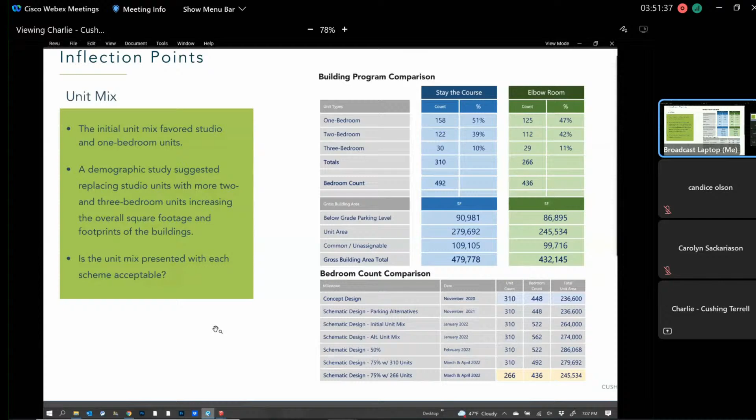Okay, bedroom count, human count, the next level up, right? Because I want to be mindful if there's a big difference in bedroom utilization between different size units, that we take that into account. If there are more people that can be in 1 and 2 bedrooms than a couple of 3 bedrooms, I'd rather go with the 1 and 2 bedrooms.

I do think that we're kind of getting down to the level of detail where not much of this is going to really be moving the needle a lot at this stage. But it's good to hear, we want to hear more of this.

The only thing I want to add on to this conversation is about location. As we were going through the presentation tonight, I was wondering about those 2 buildings being thought of as rental and a building being thought of as ownership. Where would those 3-bedroom units land? Are they split across? Are they better served on ground floor level for 3-bedroom units, that kind of thing?

I'm comfortable with the experts programming what that looks like, because I could only make guesses, like maybe all your family units should be in an area together, but maybe that's not correct. Maybe it's better to blend and mix them. I don't know these things, but what you've shown as initial mix counts, I'm fine with that. I would just ask that you think about that as we go forward.

Okay, just one other piece I want you guys to hear. I know we're not choosing categories tonight, but Ward mentioned, for me, I really see this as a lower category project. We have a need in all the categories. I think there are better tools to deliver those higher category units. I really think of this as primary category 1 and 2, with maybe some 3.

I understand the argument that we don't really need category 1 because there's not a big demand for it. Candidly, I think Rachel was talking about starting wage at the Wendy's in Glenwood now being like $400 shy of category 2. So I realize there's not going to be category 1 jobs in our current buckets, but all category 1 means to me is the lowest income strata of jobs available. I guarantee by the time this project is up, we will have bumped those incomes, and the people at the lowest end of our economic strata in our workforce are the ones most struggling to find housing. So I want this to be a place for them. Let's think about that more than 'category 1 equals 38, therefore there's no need for it.'

Fair enough. Okay? Does that make sense? Yes. Okay, thank you. Unit count.

The next inflection point is unit count, and we just talked about that a lot. So I understand the direction, and just to confirm that we're going to focus on the elbow room scheme plus the 14, with the items Chris was mentioning, those potential variations on that — that's what we understand as our direction. Am I understanding that correctly? Okay, thank you. Which is really the next page.

I appreciate lamenting the notion that we need more housing. It's a housing crisis, right? You've done everything you can to this point to try to do as much as possible, as responsibly as possible at this site, while trying to balance what you're hearing from the community outside. So not a simplistic task, right?

Given the direction this team has to move forward to get to 100% schematic design, I think you've given them the direction they need to continue with the remaining work.

We did look at the timeline. We are not exactly on schedule, right? We've been pushing out a little bit, not enough to ruin the project, of course. But we do need to continue to stay the course on the timeline, because if we don't deliver units to the community, then all of the good intentions fall by the wayside, right? So we have to continue to do good work.

There were two good choices on the table today, and you're actually coming away with a third good choice out of those, right?

I just want to say, you guys owe no apologies, nor does staff. You've done really good work that you should be proud of. And you have a very difficult task dealing with five very opinionated people with different life experiences and expectations. Sometimes in that process, naturally things get brought up, and one of us may have a different idea of what is or isn't coming back.